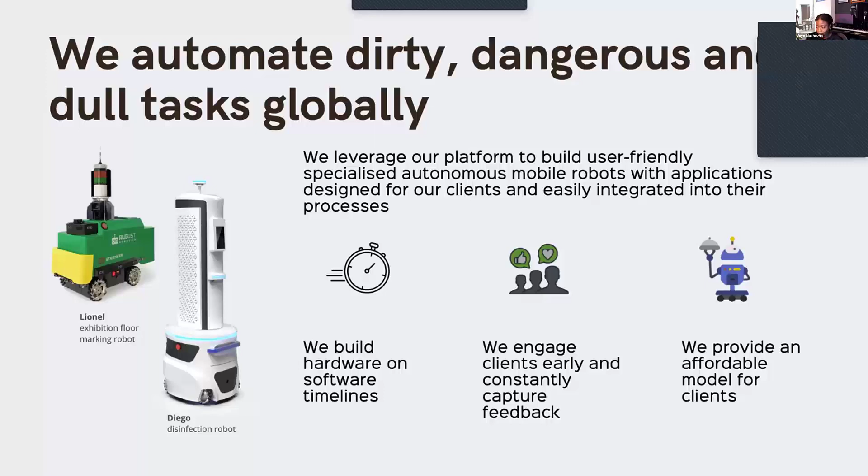Our first robot's name is Lionel. Lionel works primarily in the exhibition industry doing floor marking.

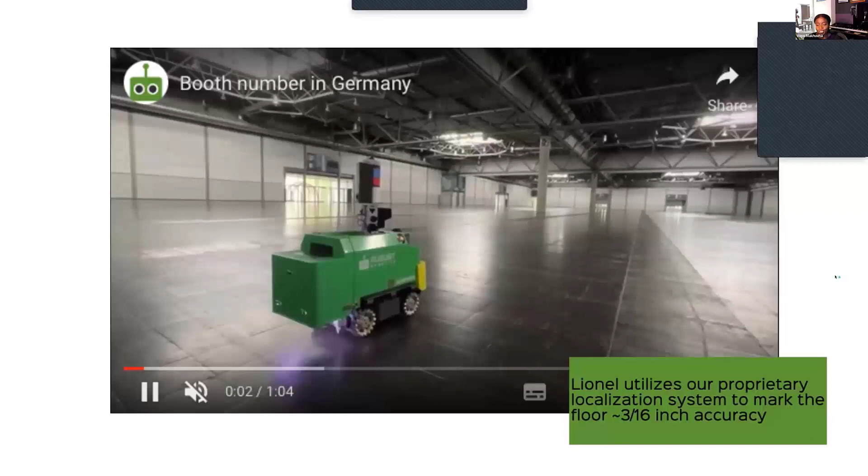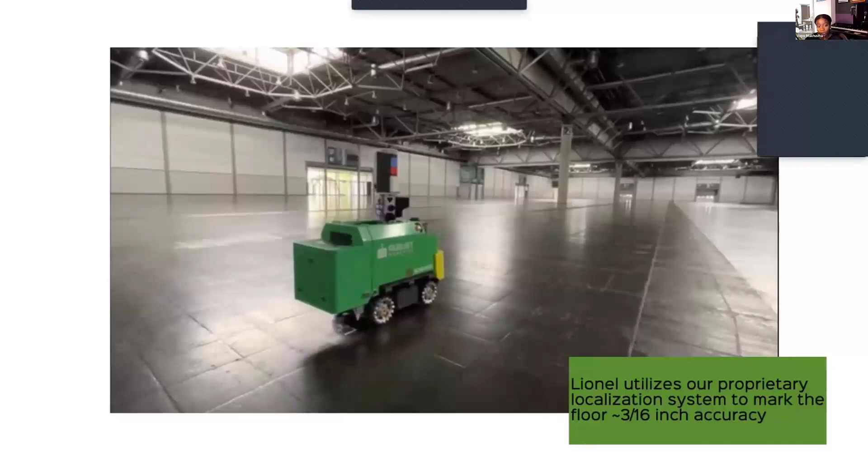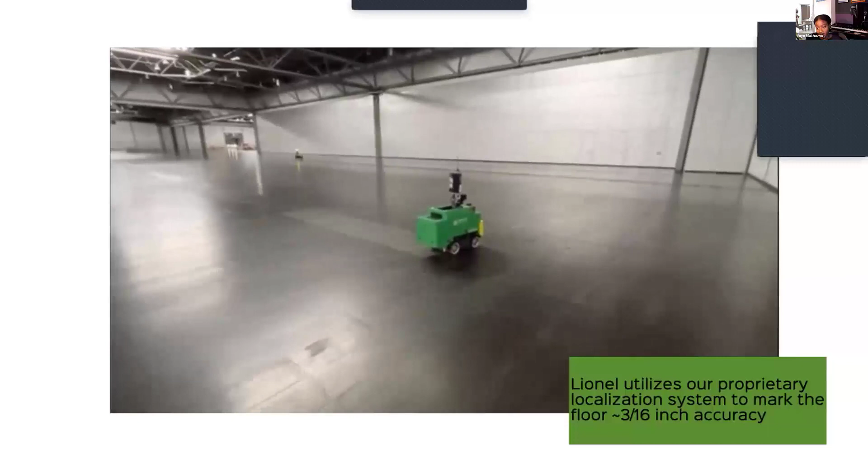I'm not sure what you know about the exhibition industry, but a very critical first step is to put all the marks for that trade show on the floor. Now, these marks are things like booth corners, rigging points, sanitation points, electrical points, their descriptions, and all of these marks need to be accurately placed within about 3/16 of an inch. So in order to serve our clients, we have to use our proprietary localization system so that Lionel can work in these huge halls and understand its position with the level of accuracy required.

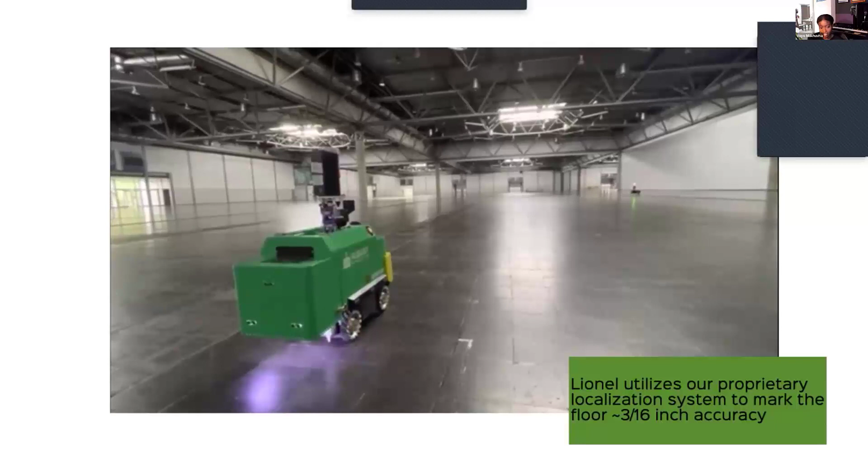Traditionally, how this is done is there'll be like 10 to 15 men on a floor with printed out CAD plans and a tape measure, marking out each of these 1,000 points by hand. Being able to automate that increases the efficiency of that process in a way that also minimizes the impact on people's bodies.

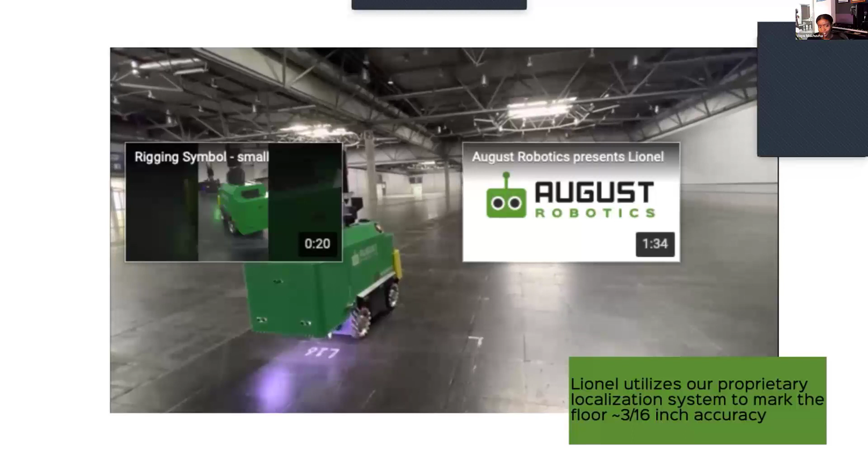So this is Lionel, and I really just wanted to give a brief introduction because I do reference it later on.

So my intention today maybe is a bit different. It's really to give a different view or approach to thinking about robotics and reduce the iterations to achieve successful adoption of robotics. I like to think of this as giving additional considerations for prioritization.

We are fortunate to be in an industry where there's so much impact we can have. There's so many use cases, so many opportunities to provide value through robotics. And I'm sure for many of us trying to decide what to focus on, what challenges to take on, can be a bit tricky at times. So I hope in this talk I find a way to add more layers to help make that prioritization process easier.

It's also just a way to give insight into different stakeholders' considerations when looking at robotics. So I've titled this talk, Finding the Sweet Spot. It's really about developing impactful robots, and by doing that, accelerating the adoption of robotics across industries and across the world.

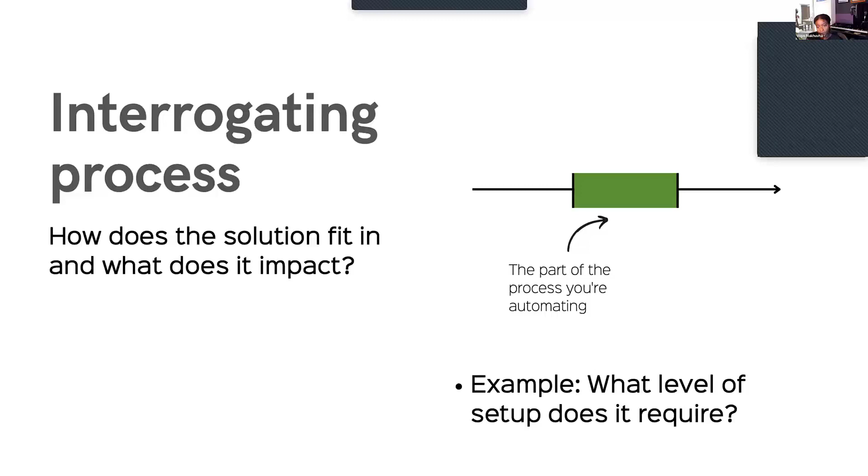Some examples could be: what level of setup does it require? Does it need new capabilities? Does it add time to another process? Because in order for this to work, you need to add a new process in between, kind of as a setup process.

And this is important because it becomes interlinked with the value that you're able to give your users. For instance, if you're trying to increase efficiency, and the product you're developing is able to decrease the time taken from the process by 10 minutes, but the setup you require is 20 minutes, then net, you get to a point where you're adding 10 minutes to the process.

So if you go back and evaluate that value you defined, which is increasing efficiency, then you find yourself stuck. And there are probably some technical considerations you can make - there may be new technical requirements or new things you do to ensure that doesn't happen. Or it might mean you need to reevaluate whether this is the right solution.

Alternatively, if you're in the same case, but the value you're trying to achieve is to increase worker safety, then maybe adding 10 minutes to the process is necessary or worth it because of the lives you could save or the injuries you could reduce. And so process and value become really intertwined sometimes, because there are things you're willing to give and take based on what you're trying to optimize for.

Similarly, if you create a solution that requires specialized capabilities, is this something the user can take on? Can the user learn whatever they need to learn to implement this successfully? Or would you get to a case where you have a great product, a great robot, a great solution, but because the capabilities required can't be transferred, or they don't want to hire an engineer to add those capabilities to the team, the solution you've created - although impactful in theory - cannot be impactful in practice.

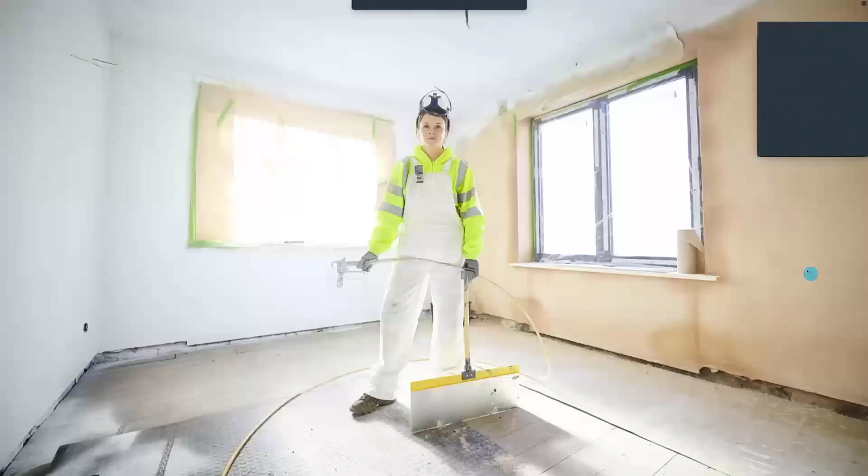So I decided to choose a random use case, and I chose construction, because I think the robotics industry loves construction for valid reasons, right? There are tons of processes. The level of automation, digitization, and modernization in the construction industry is not what you would expect in 2022. The average age of a construction worker is increasing, and productivity hasn't really increased in the last 50 to 100 years. So it's always a really interesting industry to look at.

And I've chosen painting because I think most of us will believe it's something we can tackle from a robotics perspective. We've seen this done in factories, whether in car manufacturing or other manufacturing processes. The other major capability we need is to understand the environment, what the room looks like, and navigate in that environment. Something we've also kind of overcome as a community. So it combines two major capabilities we see around us all the time. I'm going to apply that framework to it and show how things might turn up and how you'd have to reconsider some things.

So defining the value, what would be the value of having a painting robot in a construction site? I guess you could say increasing efficiency, increasing quality, increasing worker health, or reducing injury. I'm going to go with increasing efficiency as the anchor value that we're trying to solve for and see how we go.

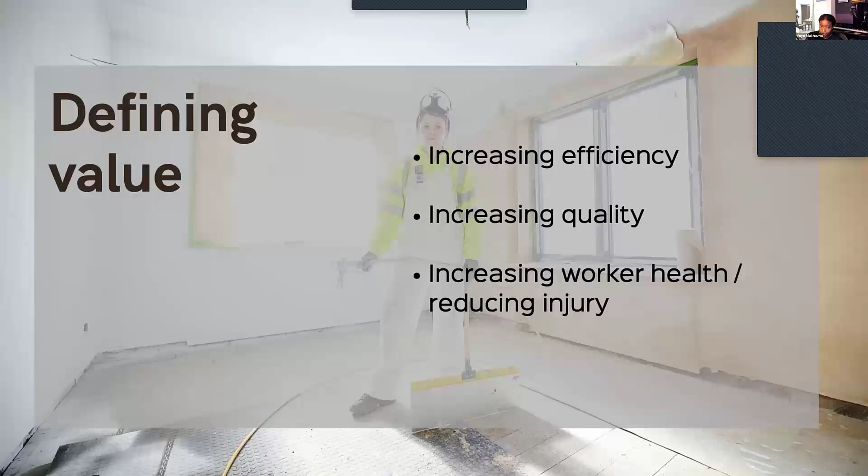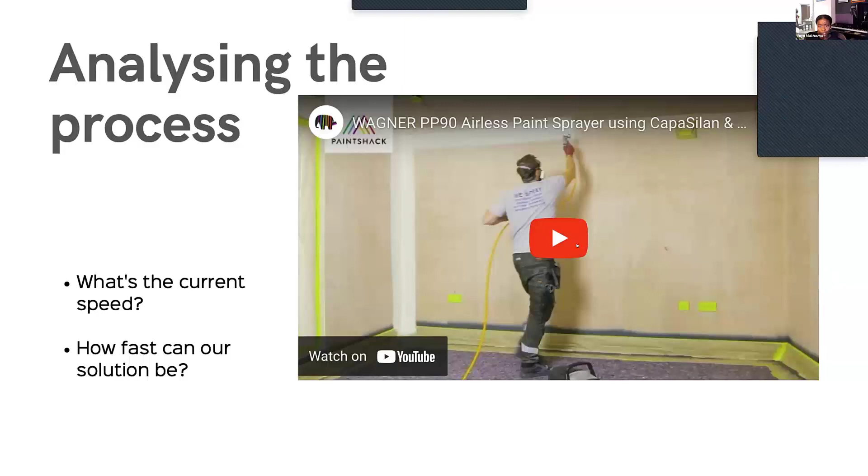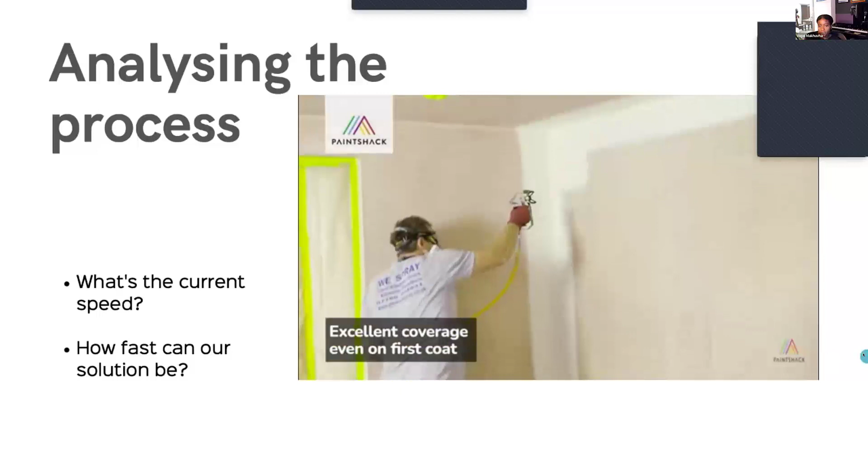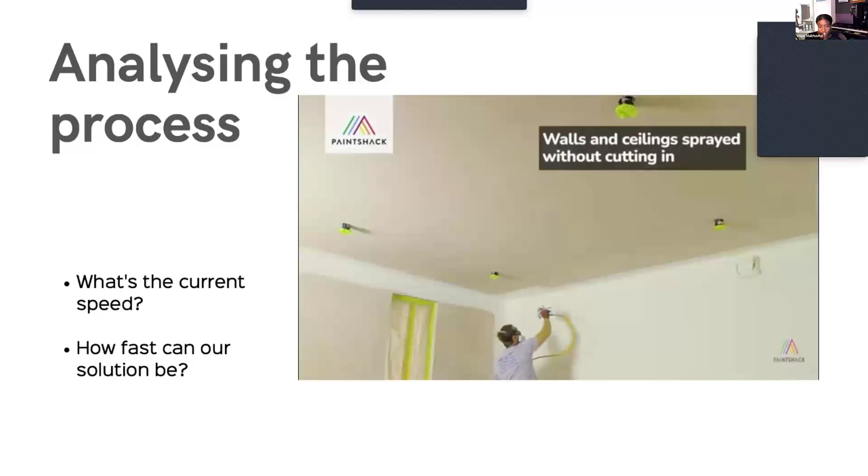Analyzing the process would be to take a look at the whole painting process, from walking into an unpainted room all the way to a completely painted room. I'm not going to show the whole video, I'm going to go to where they paint just for us to look at that process. Somewhere here, I think. When you look at it, it seems pretty standard, quite easy, as long as you're moving all the time and pressing down on the spray gun within the right amount of pressure. It's quite an easy process, I think, to automate.

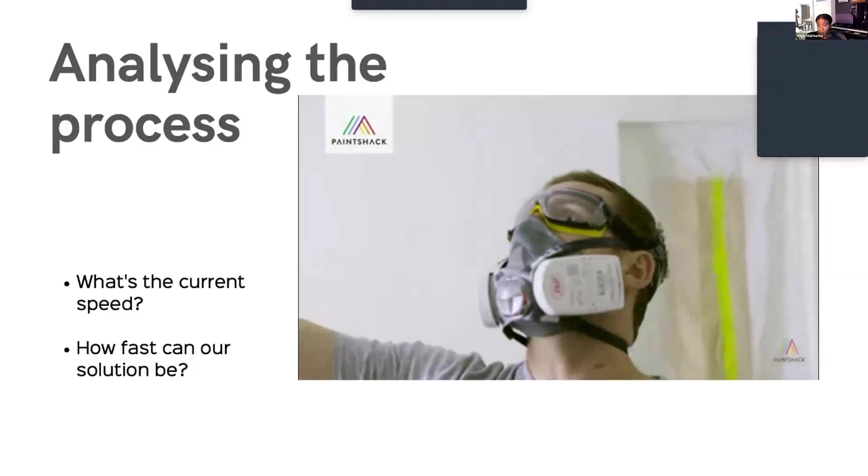If you look at the speed there, the person doing it can already go quite fast. So the question can be, how much faster can our solution, our robot, be? Can it be that much faster? I would guess maybe the max you could do is decrease the time taken by maybe 50%. So that's part of analyzing the process, to map it out and look at how much time is spent on each part of the process.

When you talk to painters and ask them how long painting takes, most of the time they'll say it depends, which happens a lot when you're trying to figure out an industry. But after asking quite a lot of questions, you realize painting isn't actually that much of the process. It's super quick, you can paint a decent sized room in like 5 minutes.

So if painting is only 15% of the process, and spray painting is pretty fast, let's say we can improve it by 50%, so we take 7.5% of the time out. You ask yourself, is this the highest value, the highest impact I can make on this process? Because there's much higher value elsewhere. Other parts of the process take much more time, right? The 35 to 40% of surface preparation, or the 25% of masking and sheeting.